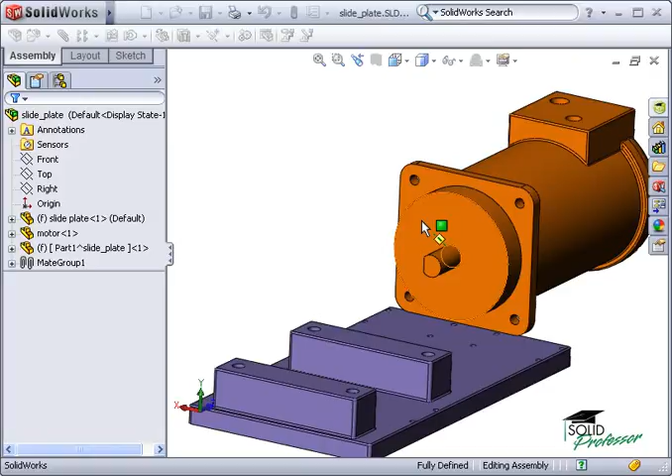If you would like for your new part to have the same orientation as the assembly, I'd suggest selecting the front plane of the assembly from the Feature Manager tree. This will ensure that the front, top, and right views of your new part will look exactly the same here in the assembly as they will in the new part itself.

Notice that I'm immediately placed into Edit Part mode, and that a sketch has been started on the plane I just selected. In this case, I don't want my first sketch to be on this plane, so I'll exit Edit Sketch mode. Instead, I'll begin a new sketch here on the face of the motor flange.

The shape of the motor mount will be defined by using an offset of the flange shape. With the face still selected, I'll click the Offset Sketch tool and specify an offset distance of 0.5. I'll delete the lower fillets and use the Trim tool to extend the line segments to a corner.

To complete this profile, I'm also going to create an offset from this edge of 0.05 inches. With the profile complete, I'll extrude this sketch 0.4 inches.

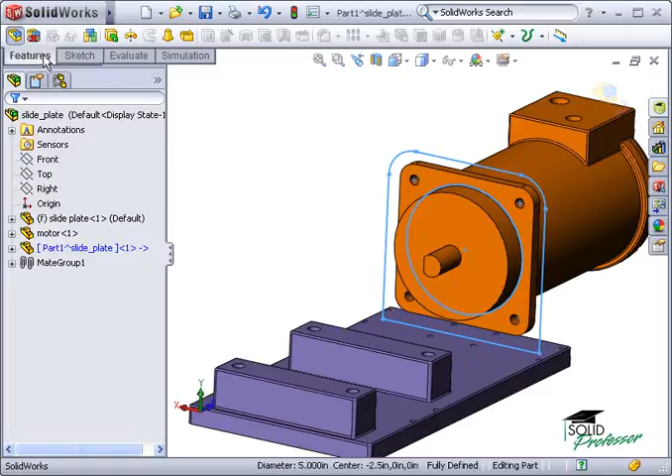Next, I'll create an extruded boss on the face that will provide a way of securing the motor mount to the base plate. I'll sketch a rectangle the same width as the first extrusion, with a height of 0.4 inches. And I'll extrude it 3 inches.

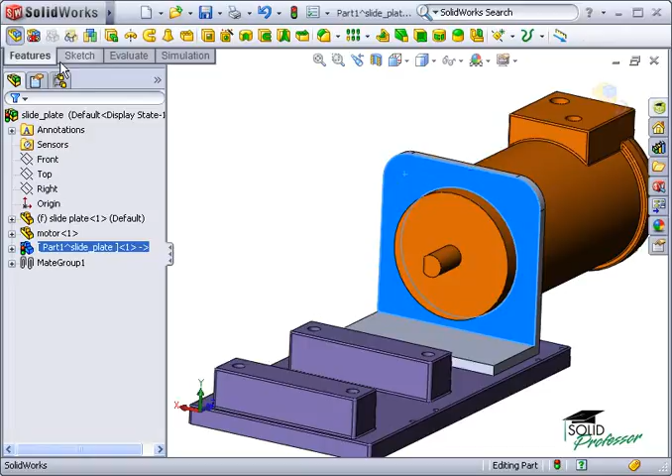To complete this part, I'll create the mounting holes for the motor. I'll select the vertical face and click the Hole Wizard icon. The holes will be 3/8 by 24 tapped holes.

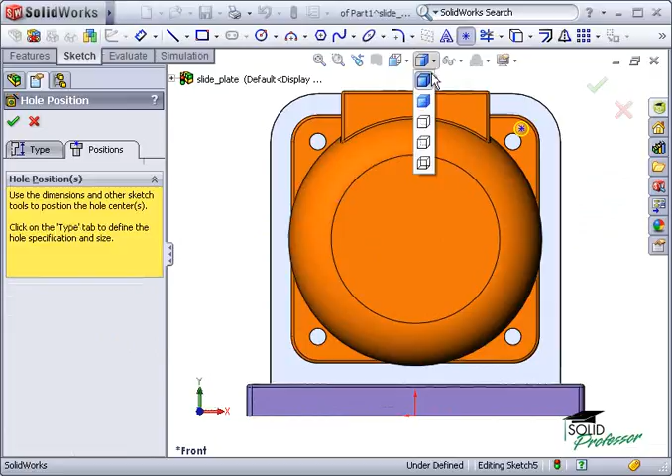To locate them, I'll change the view to look directly at the face and switch to wireframe. This will make it easy for me to reference the holes that already exist on the motor mount flange. I'll click Finish, and the mounting holes are created.

Before concluding this lesson, I want to review the external references that were created in this part. Starting at the bottom of the Feature Manager tree, you can see the sketch used to position the holes has an external reference. You can also see the sketch used for the first extrusion has an external reference. This was a result of using the Offset Sketch tool.

In addition to these external references, there is another important item in this part that allows these in-context features to work properly. You'll find this item in the Mates folder. It's a mate called In Place. The In Place mate is automatically added when a new part is added to an assembly.

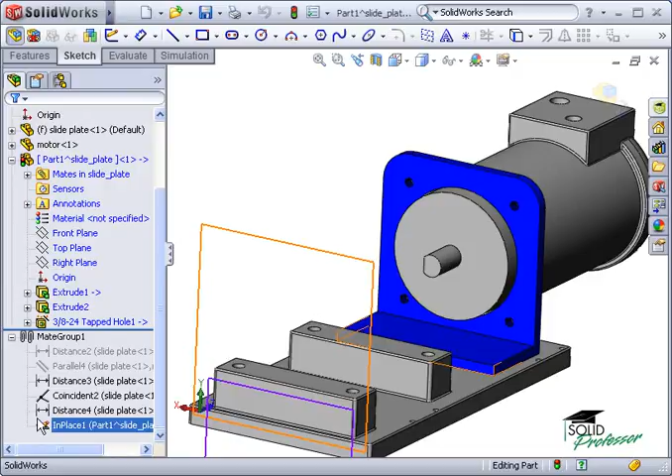This is a special mate that completely defines the position of the new part. Notice that if I return to Edit Assembly mode and try to move the motor mount, the component is fully defined without me having to add mates manually.